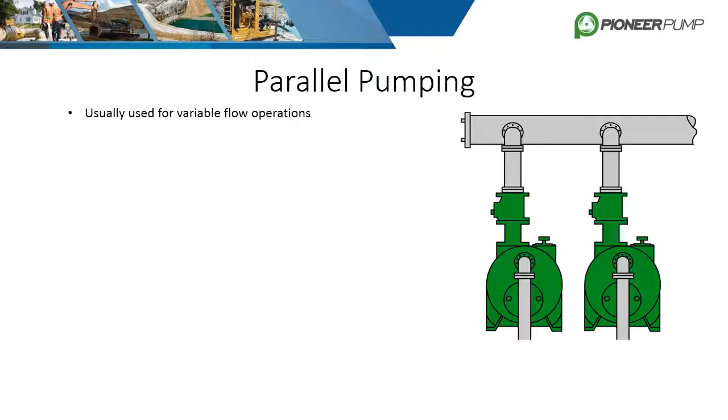Parallel pumping is when two or more pumps are pumping from the same source into a common pipe or header, or sometimes just discharging into open atmosphere. This setup is primarily used for variable flow operations. The system can adapt to variable flow by adding or subtracting the active pumps in order to achieve the desired flow, while allowing the pumps to perform at near peak efficiency.

If a system has two identical pumps, the head will remain the same as if you had a single pump, but it will produce 2 times the flow. If the system is pumping into a common pipe, make sure it is large enough to handle the maximum possible flow without exceeding the total head of the pump due to friction losses.

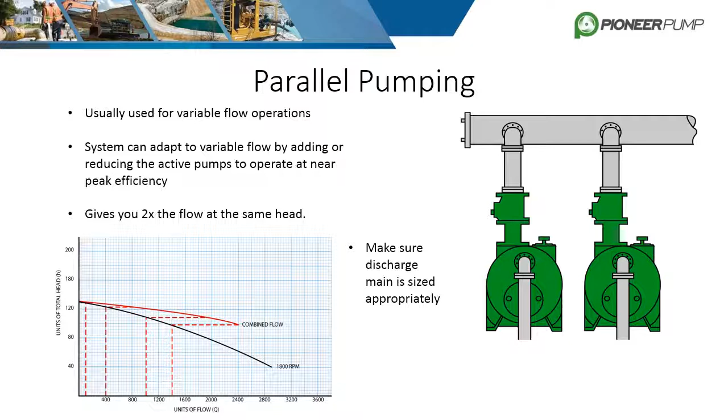Series pumping is like parallel pumping, but produces the opposite result. Pumping in series is designed to achieve higher heads at the same flow rate. The first pump is set up normally, but its discharge is piped directly into the suction of an identical pump. If the pumps have the same hydraulic characteristics, the head is doubled at a given flow.

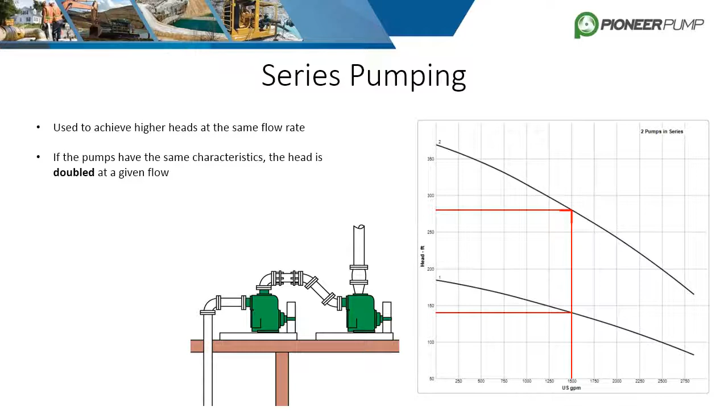It's important to know that the pressure a pump sees at the suction is not lost or destroyed as it goes through the pump. That initial pressure is added to the differential pressure the pump creates. This means that the second pump in series will see much higher pressures than the first. Be sure that the second stage pump can handle these pressures.

Typical modifications to allow for higher pressure operations are class 300 flanges, a balanced mechanical seal, and the removal of the priming systems, which are not designed to handle high pressure. Recall that normal suction pressures are low or even a vacuum relative to atmospheric pressure.

Pumping in series generally requires less horsepower compared to running a larger pump at the same duty point. Pumps can be run at higher efficiencies in most cases and at lower speeds, which reduces wear, uses less energy, and increases the pump's working life.

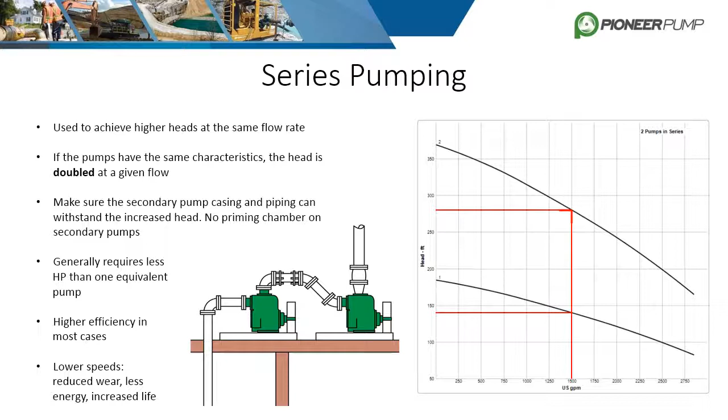Pump efficiency is a major selling point and pivotal characteristic of the pump. It's easy to read the efficiency off the pump curve, but it's important to understand where this number comes from and what it means. Pump efficiency is the power of the water divided by the power of the shaft. It is a percentage of how much of the shaft power is being transmitted into the fluid.

The power of the water or fluid is determined by multiplying flow in GPM by head, which is in feet. This number is then divided by 3960 to convert it to horsepower. Once water power is calculated, it is divided by the brake horsepower of the shaft to get pump efficiency. Underneath these numbers lie 3 main factors in determining overall pump efficiency.

The first factor is mechanical efficiency. Mechanical efficiency includes friction losses in the bearings and seals. While modern ball bearings and cassette seals have low friction losses, they still negatively affect efficiency.

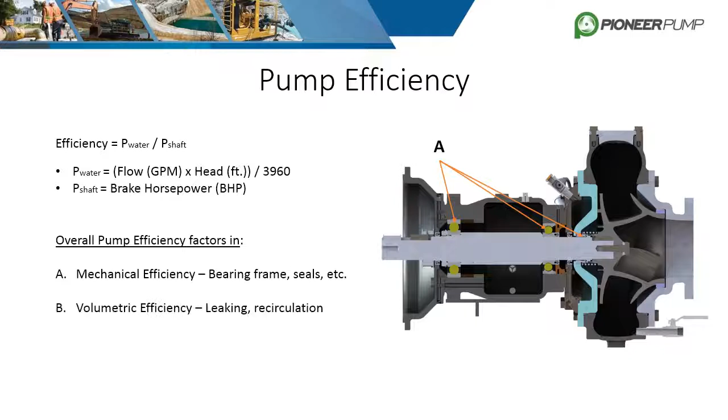The second factor is volumetric efficiency. This includes any leaking or recirculation of the fluid. Volute design, modern seals, O-rings, and tight wear ring clearances all help decrease these effects, but almost all pumps have some leaking or recirculation happening during operation.

The third and largest factor in pump efficiency is hydraulic efficiency. This includes liquid friction and losses in the volute and impeller. A well-designed impeller imparts more of the shaft power into the liquid. Enclosed impellers, like Pioneer uses, prevent more recirculation compared to semi-open or open impellers.

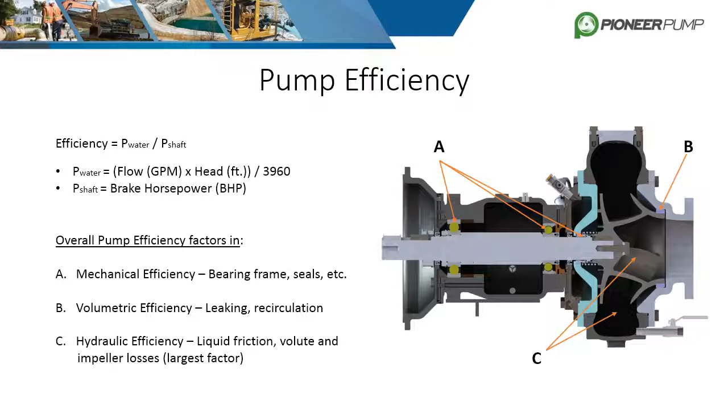The affinity laws relate to performance of centrifugal pumps. They help extrapolate and predict pump performance at different velocities and impeller sizes. They are most useful for when a pump needs to be modified to hit a different required duty point. The speed change laws help predict flow, head, horsepower, and even NPSHR at a new given speed.

Let's say a pump curve only goes up to 1800 RPM, but the customer wants to run it at 2200 RPM to see how much more flow they can get. The first equation can predict that flow.

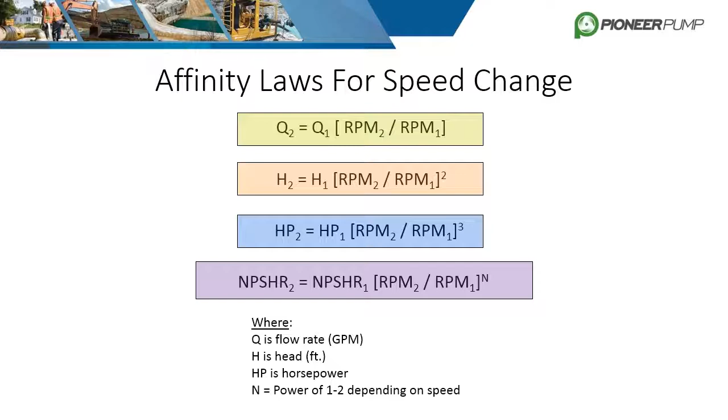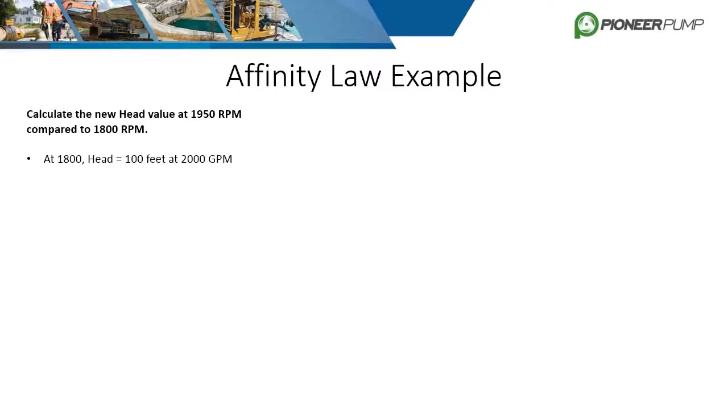Before we move on to cover diameter changes in relation to the affinity laws, let's run through a speed change example. The initial operating condition is 100 feet of head at 2,000 gallons per minute, running at 1800 RPM. We want to know the change in head when the speed is increased to 1950 RPM. Step 1 would be to use the head equation to calculate head at the new speed. After we plug in the figures, the resulting head value is 117.4 feet.

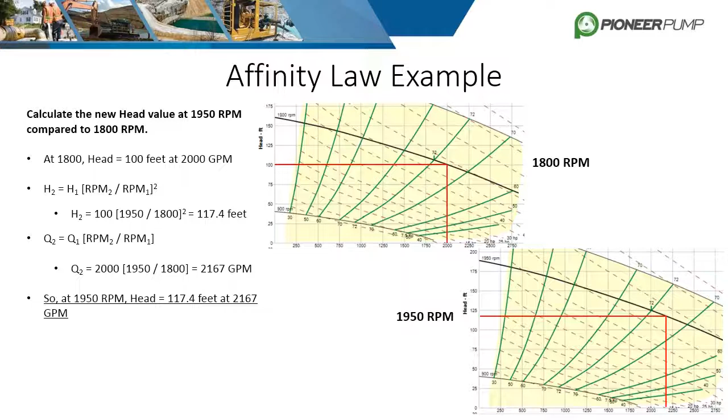Be aware that this new head value also has a new flow rate coupled with it. You cannot increase the speed of a fixed system and not also increase the flow. To find the new flow rate, simply plug the speed values into the flow equation. The new flow rate at 1950 RPM comes to 2167 gallons per minute. The images shown are curves generated from our pump flow software, confirming that our math is correct.

The affinity laws for diameter changes work the very same way. Trimming the impeller is a common practice when trying to hit a specified duty point within the limits of a specific horsepower or max speed. An example would be a customer is sizing a pump, but he only has a 20 horsepower motor. The plant requires a certain size pump, but the pump at full trim overloads the motor by requiring 30 horsepower. By trimming down the impeller, the horsepower required will be reduced.

One way to solve this problem is to solve for the new diameter, diameter 2, when the desired horsepower is 20. This involves some equation manipulation that could be a little confusing, so another option would be to guess and check. Let's say the full diameter impeller is 10 inches, which is our diameter 1, and we want the required horsepower if we trim it down to 8.5 inches, diameter 2. When we plug these numbers in and solve the equation with the initial horsepower being 30, the new required horsepower is 18.4. This new trim will not overload the 20 horsepower motor.

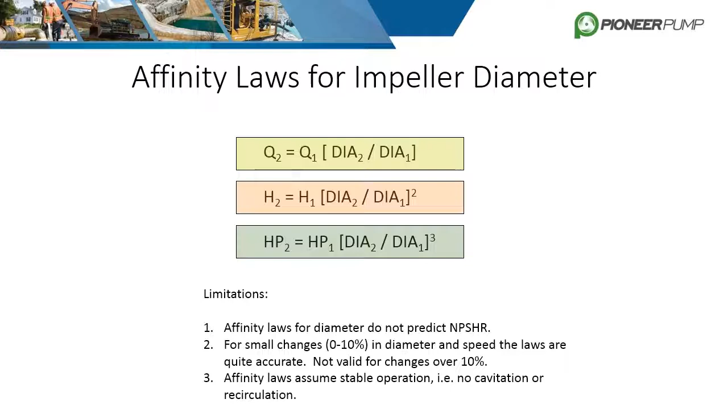It's important to understand that while the affinity laws are useful and can be fairly accurate, they do have strict limitations. Notice that affinity laws for diameter change do not predict NPSHR. The affinity laws are not valid for changes greater than 10% for both speed and diameter. And lastly, the laws assume stable operation, meaning no cavitation or recirculation, and that the system has remained constant in terms of pipe size and lengths.

Specific gravity is defined as the ratio of the density of a substance to the density of a standard substance. This is usually water for a liquid and air for gas. Surprisingly, it has no adverse effects on pump performance, but it does affect horsepower required. This can be proven by using two different equations. The first equation is used to calculate brake horsepower. Because specific gravity is a required variable, it directly affects brake horsepower. The heavier the fluid, the more horsepower required.

The second equation is used to calculate work done by the pump. This equation considers the weight of the fluid in pounds per gallon. If a given fluid weighs more than water, the amount of work is increased, thus increasing required horsepower.

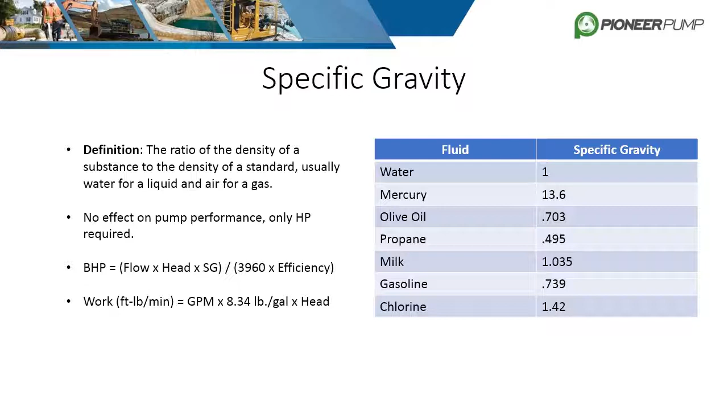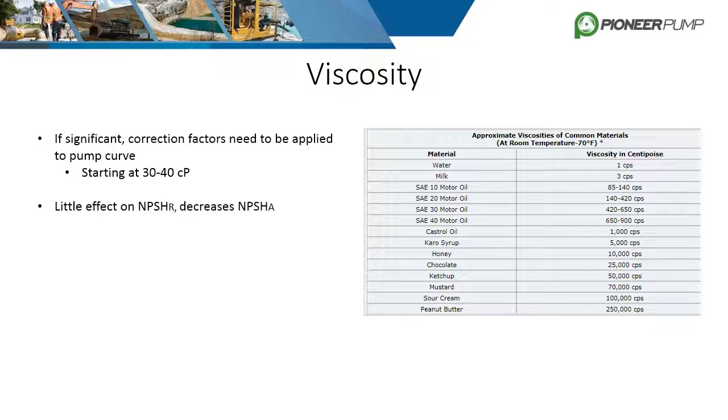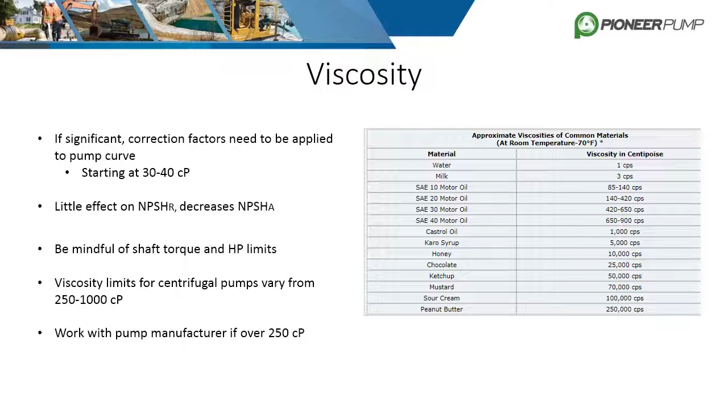Unlike specific gravity, viscosity can greatly affect the pump's performance as well as power required. Correction factors need to be applied to the pump curve once viscosity reaches 30 to 40 centipoise. It has little effect on NPSHR, but it greatly reduces NPSHA. Due to the increased required horsepower, be mindful of the torque and horsepower limits of the pump shaft. The viscosity limit for centrifugal pumps depends on the application, fluid, and pump geometry, but they can vary from 250 to 1000 centipoise. It is recommended to work with the pump manufacturer if the fluid is over 250 centipoise.

The curve shown is a standard variable speed curve for the Pioneer Prime 66S12 trimmed to 11 inches. There are many lines and figures displayed on the curve, and they are all very important to understand. Let's first establish our X and Y axis. The X axis is always flow, either in gallons per minute or the metric meters cubed per hour. The Y axis represents head, either in feet or meters. Depending on how and where the curve was created, there might be a shaded region in the middle of the curve which represents the POR, or preferred operating range.

This range is commonly defined as 70 to 120% BEP, which stands for best efficiency point. Towards the top there is a blue dotted line labeled NPSHR at 1800 RPM. At a given speed, NPSHR only varies with flow. To find NPSHR at a given flow, simply find the flow on the x-axis, follow that point vertically till you reach the NPSHR line. At that point, draw a line over to the right and read off the chart running from 0 to 30 feet.

The more vertical and curved lines on the graph are the ISO efficiency lines. These lines tell you what the pump efficiency is anywhere on the curve. Each speed curve has a best efficiency point. That point is where the speed curve intersects the highest efficiency line.

The other dotted lines shown in the curve are constant horsepower lines. When sizing the motor for any application, an important consideration is whether the pump will ever be required to operate at a flow rate higher than the design point. If, for example, the pump could operate at the end of the head capacity curve, the actual horsepower requirement may exceed the design point selected motor horsepower and overload the motor. For this reason, it is common practice to size the motor not for the design point, but for the end of the curve or maximum horsepower requirements.

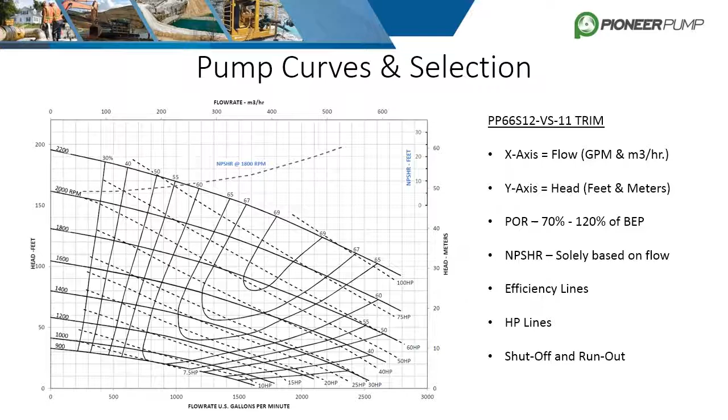The image shown is a screenshot of the pump curve of the PP66S12 trimmed to 11 inches when putting in the duty point of 1,500 gallons per minute at 120 feet. Pioneer uses two different pieces of software for pump selection, PumpFlow and Intelliquip. The software used for this slide is PumpFlow.

As mentioned in part 1 of this training, the pump will operate where the pump curve intersects the system curve. Because our trim is fixed, PumpFlow calculates that the speed needed to hit this duty point is 1990 RPM. PumpFlow also calculates NPSHR, efficiency, and power required at the specified duty point.

The next step in the selection process is knowing what the driver is and making sure it can hit the duty point. If the driver is a diesel engine running at 1990 RPM, it shouldn't be an issue, being that most diesel engines can run at that speed. However, if the driver is an electric motor, a problem arises because 1990 RPM is not a nominal motor speed. Luckily, there are a few options for hitting the required speed.

One option is a variable frequency drive, or VFD, that can speed up the motor like the throttle to an engine. The other option is to belt drive the pump. Running belts allows for the pump to be run at a higher or lower speed than the nominal motor speed by utilizing belts and pulley ratios. Another scenario is that the speed is fixed and we need to hit a specified duty point. This is where we utilize a variable trim curve and figure out what trim is required to hit the duty point and not exceed another potential limiting factor like horsepower.

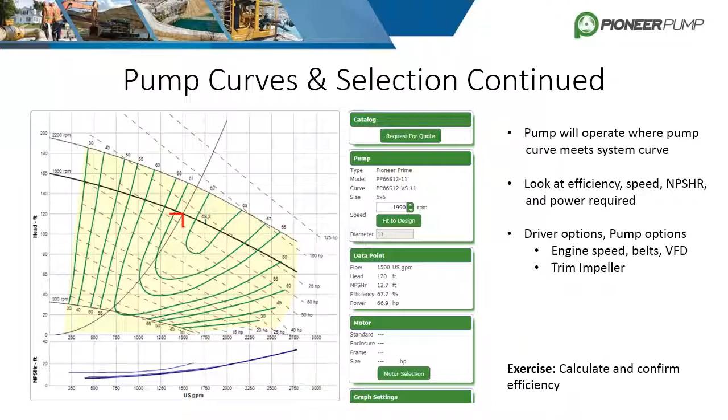This concludes part 2 of mid-level system design. To review, this training covered parallel pumping, series pumping, pump efficiency, the affinity laws, specific gravity and viscosity, and finally pump curves and selection.